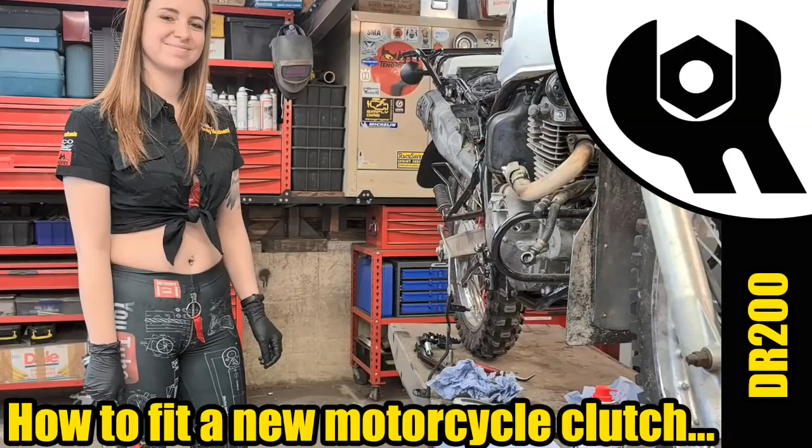Right, on this particular video, there has been a trend, we're busy reassembling this bike, getting it ready for an epic bike trip across New Zealand, covering almost 4,000 kilometres of gravel roads, beaches, forests, you name it.

I'm going places nobody has ever been on a DR200 before. In this video, we're actually going to start taking the bike apart again, because we really haven't done anything with the engine yet. We've done lots of other stuff, but the engine itself is as it came off the farm, and it had done 13,000 kilometres of farm use.

That's a lot of work for a little bike like this, and it may well have been mistreated quite a bit. So things like the clutch especially will have had a very hard time. Some riders on farms don't believe in changing gear - they could be in third gear and want to go really slow, rather than go down to first, they just ride the clutch. I've seen it many times and it just burns the clutch out.

So I don't know the condition of the clutch on this bike. It seems to ride okay. I remember I did ride it once, just around the garden, but it wasn't under any kind of real load, so it wasn't a true test.

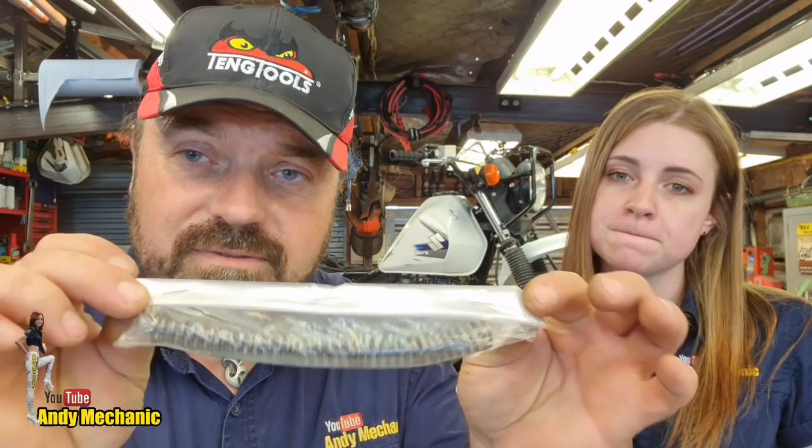Now, I do have some clutch springs - there's 5 in here, but I can't give you the part number because it hasn't got it on the bag. I don't know where these came from, to be honest. So I did order genuines, but this doesn't look like a genuine bag to me, so maybe they had to get aftermarket ones for those.

And last but not least, we need a clutch cover gasket. Here we are, brand new, genuine, and there's the part number again for that.

So we've got a lot to do, but we have to do it in 2 stages, and the reason for that is the friction plates need to be soaked in oil overnight before you fit them. You must not fit them dry. They're designed to run in oil, and if they're not soaked and they're still basically dry when you try and ride the bike, they're going to wear very quickly. That's not good because you're reducing the life of the clutch big time.

So in this video, we're going to strip it all down, get the old clutch plates out. We're going to soak the new clutch plates, and then we're going to pause, do another video on something else, and then tomorrow finish this video off. Now for you, the viewer, it'll seem seamless, it'll just happen, but be aware that the clutch plates will have been soaking for about 12 hours.

Which is fine. Okay, Holly, I've talked way too much, as I always do. Now is time for you to do some work on the tools. We're going to have to, looking at the bike, remove the right-hand foot peg again, which takes the right-hand side stand away.

We've got to remove the foot pedal brake off the bike because that's in the way of getting the clutch cover off. We need to drain the oil and maybe some other stuff. Oh yeah, there's some oil lines - it's got an oil cooler on it, so we've got some oil lines to disconnect as well. So we've got a few bits and pieces to do, and well, I suppose realistically we should really just crack on with the video, shouldn't we?

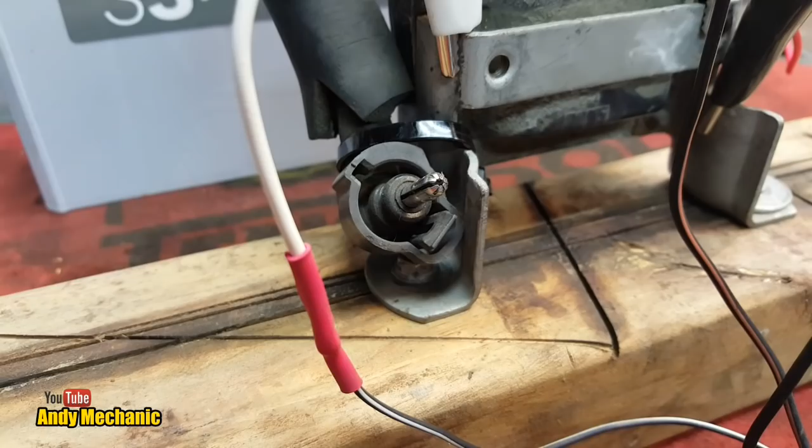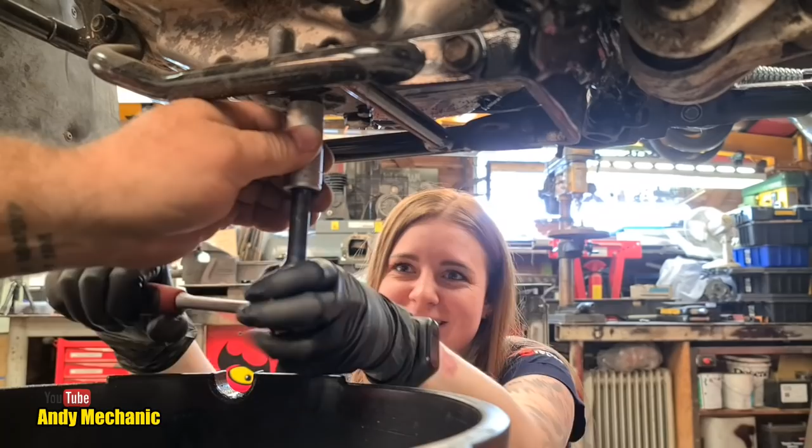I'll do the noise. Ready? Jeez, it's going to slip off, it's going to round off. Hang on, all right, you ready? All right, I'll give it a go. Hang on, I'll give you a bigger tool - bigger tools are always good. So it's 17, right? Yeah, all right, we'll go up in the world.

Okay, going bigger, there you go. Obviously somebody has massively over tightened that - you know, farm servicing and all that. How's that going to work? Is that going to work? Don't let it slip. Ooh, God. Oh man, who tightened that up? Jeez, that's ridiculous. All right, do you want me to crack it off for you? Yeah, that is just - you steady the bike. I'm going to get rid of that because it's all going to go a bit pear-shaped otherwise.

I don't have enough leverage. All right, you ready? Yeah. It's not going to fall over on you. Right, there you go, that's yours. It's cracked off, you can use the normal ratchet now if you want. That was ridiculously tight - I think it should be, well, we'll find out later on, but we'll find out in the servicing video, doing the service on the engine. I reckon it was probably about 20 Newton meters, it should be, and that was probably about 50. Poor little bolt. There you go, yeah, it's loose enough. Cool.

Right, prepare yourself, oil is coming. Let's see how good - it's probably quite thick and gloopy now, look. Nice torchy. Holy moly, that's pretty black, isn't it? Yeah, that oil's had a hard life in that little engine. Jeez. Okay, let's leave that to drain and we'll start taking some bits off.

Right, we're going to need to take the right-hand foot peg off and the side stand because it's all on these two bolts here. Now, if I remember rightly, they're pretty tight, so if you use that big power bar again - cool, you'll jump that down so it's not going to slip on it. There you go. Yeah. Go on, you're right, I've got it. Just don't slip. Too tight? I'll just bring it down a bit. Yeah, get some weight on it.

Jeez, you know we put thread lock on them as well. Oh man, the thread lock might have been a bit overkill. I think probably, because it's been on there for a long time now. Yeah, all right, let me go and get the big impact wrench - that's something you can definitely get them out with. Here we go, look at that - it's so much easier with power tools, isn't it? Oh yeah. Right, good job, I'll hold this, get the second one out. Beautiful. Fantastic, stick him on there.

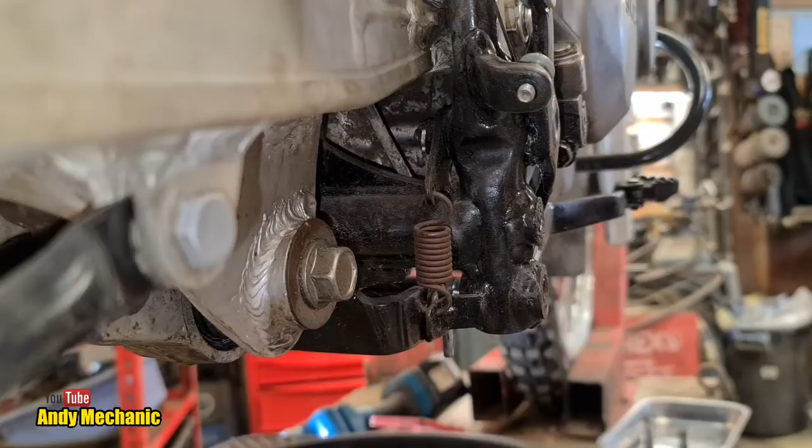Right, next job is to get this brake pedal out of the way, and then we can get the kickstart off, and then we'll do the brake line, the oil lines, and then we're about there. But this is a ball ache because it's got a little split pin right at the back, so see if you can get that split pin out. Okay, you've got pliers and side cutters and all sorts. Obviously we'll put a new one in when we come to do it.

I'll have to lend you a hair tie, won't I? Oh, that's tough. It is, isn't it? It's like, who put that there? Again, I mean, I might just replace it with a nylock nut and not have a split pin there for the trip, in case I've got to take it off for any reason, because it will be an absolute pain. It's all about trying to make the bike easy to maintain when you're out in the middle of nowhere.

Don't forget, when we first started doing this project, I didn't plan the trip. That came along a bit later on, so things I have to think about change.

I wonder if we put that on when the swing arm was out. Probably, and they would do that in the factory as well. Yeah, they don't really think of mechanics these days, do they? No, you burn so much time on these little fiddly jobs. It's a real pain. A screwdriver? We can do that.

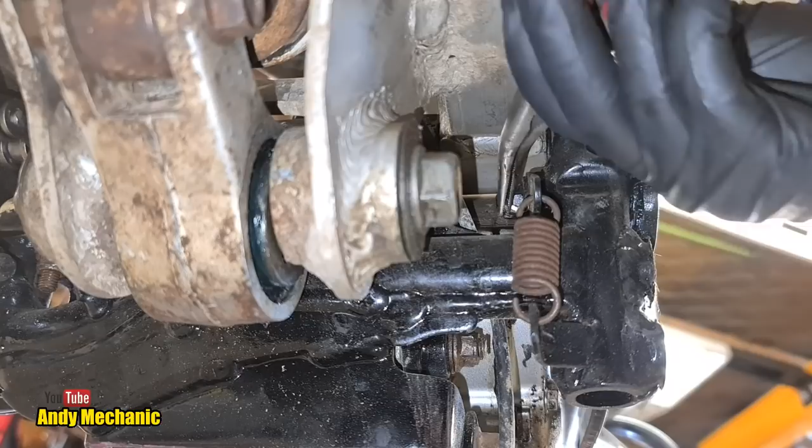I can actually see a lot better looking at the camera than probably you can see. Yeah, you can see what you're doing. I think you're doing a great job because it's a real fiddly one getting that one out. Don't worry, I'll edit this up so you'll look like a real pro. You're doing a really good job actually. You got one of them straight, haven't you? Yeah.

I'm not left-handed, so this is a bit... Yeah, that makes it even more difficult, doesn't it?

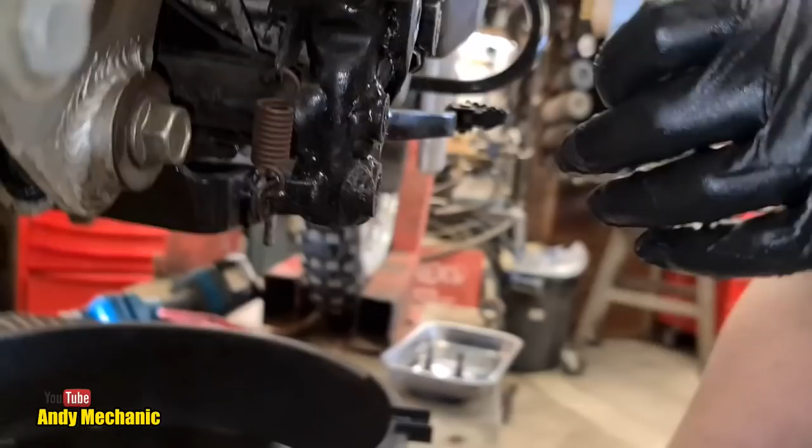You know what? Let's just do this. Are you going to give it a go? Yeah. Where's your screwdriver gone? I might be able to just ease that. If you can hold the top with your pliers, I might be able to bend this one round.

Nearly there. You got it? You got it? Looks like it, pretty much. Oh, team effort that, wasn't it? Yeah, jeez, okay, I think there is a nut behind there as well.

I think it's a 12. So I just want to grab a 12 spanner and then we'll see if it comes out. Oh, I'd use the ring end if you can. So you want to be going up with the spanner, that's it. If I remember rightly, once you cracked it off, it will come off with your fingers, and it won't be over tight, I don't think.

Do you want me to hold the lever? Yeah. Okay, the lever is held. You got it? Yeah. Not too much pain? No.

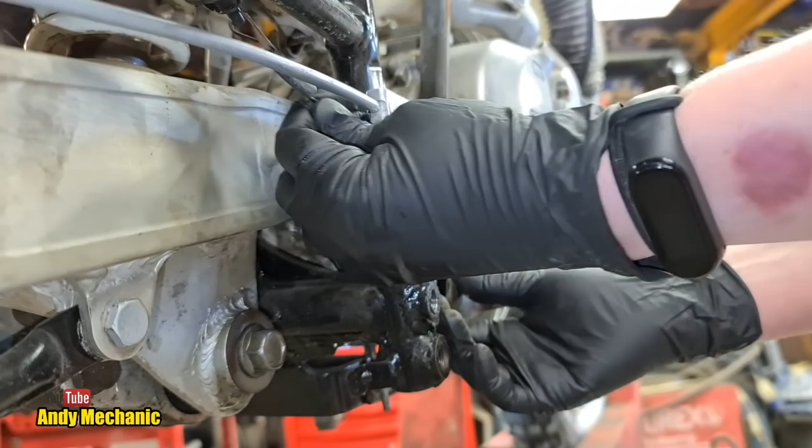Right, let's see if we can get that out without breaking the spring. Yes, there we go. Cool. Good job. Ooh, nice.

Okay, I'll stick him down there. We don't want to take him off the rod. There's no need for that. It can just sit like that for now, we can reassemble it. Okay, that's the hardest bit done.

Kickstart next. Looks like another 12, I think. So you can give that a go if you want, you've already got a 12mm spanner. Cool, I'll take over camera duty. Off you pop, let's see how you get on with that one. You'll be fine, you're a pro.

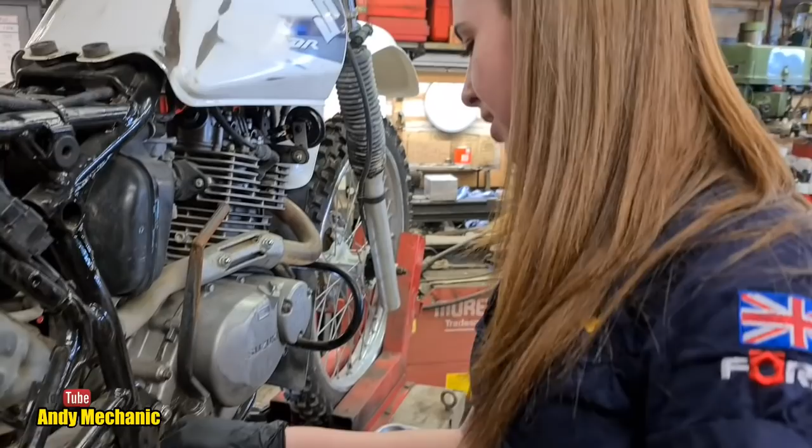This one was it? Yeah, should be a 12, I think. Oh no, this one. Here, look, that one, on the kickstart, yeah. They're usually quite tight though. Upwards.

Good job. See, to all the mechanics out there, you don't need hammers and things on spanners. Things are not normally that tight. So you break spanners as well, and they're not covered under warranty. That's right, speak to Brandon at Tang. He'll tell you that's not warranty. Easier to get ACC coverage.

Fix my hand. Oh yeah, what were you doing? I was smacking a hammer with it for half an hour. A spanner with it for half an hour.

Okay, now before you pull it off, is there a marking? Can you see a little dot to mark where the kickstart lines up with somewhere on there? Because it's pretty important that we get it back on the right place.

Not really? Okay, if you grab a rag and one of those paint pens, top right drawer of the snap-on toolbox, we can put a little line on it just to make our own reference point. Try the white one this time, because the red one we've killed, the yellow one we've killed too, haven't we? Yeah. It needs to go clean.

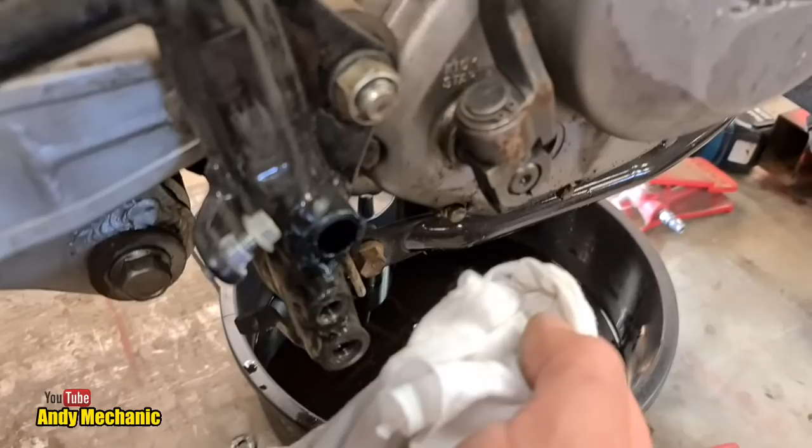Yeah, so if you give that a bit of a wipe, because it's going to be covered in grease. What do you say, you don't paint anything without cleaning it first? Yes, that's true. Is that what you said? It's all in the prep. That's right, there you go.

Just make a reference between the two components, doesn't matter where it is. Just gives us an indication later on, so we get it right, because there's nothing worse than getting things wrong, is there? No, having to redo it again. Okay, that should now pull off.

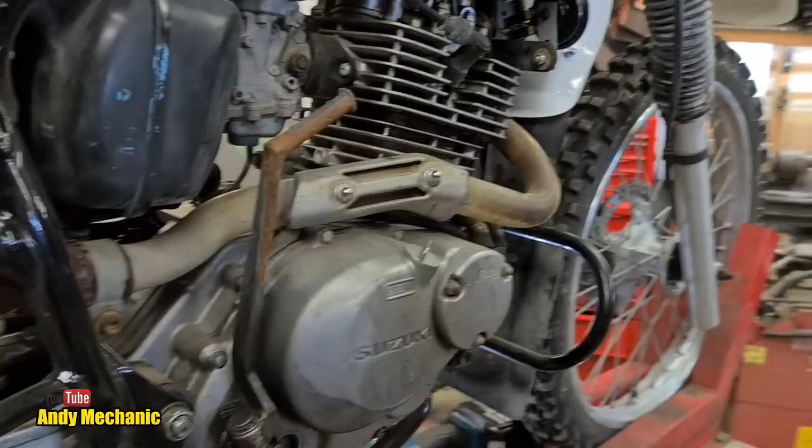Probably a two-hand job. Oh, there you go. Job done. Cool, okay, on the bench somewhere.

So what's left? We really are getting down to the clutch cover now, which is good. We're going to leave the oil filter in for now because that's going to get changed anyway when we actually service the bike, which is tomorrow.

But we've got these two oil lines to take off. Now please, whatever you do, don't lose these sealing rings, these washers, because I really don't have any more. And we are going to have to reuse them because of that.

Okay, so is it 17, or a 14, do you think? 14. 14. All right, spanner time.

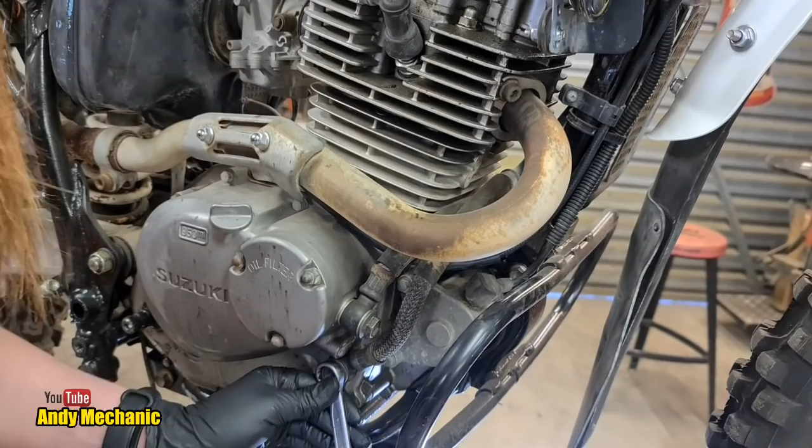Right, do you want the magic hammer because you've got two to tap off? See how tight they are. Yeah, because it has still got some magic left in it. There we go, that's one.

Cool. And it's probably going to dribble oil, so we might do well to just pull the pan across a bit, because they're for the oil cooler.

Is it going the right way? It is, eh? It is. That was very Kiwi. It is. Aye.

Yeah, that one might need a hammer. Okay, hammer time, where's magic hammer? Hang on, let's go and find magic hammer. There he is, it's looking pretty tired now.

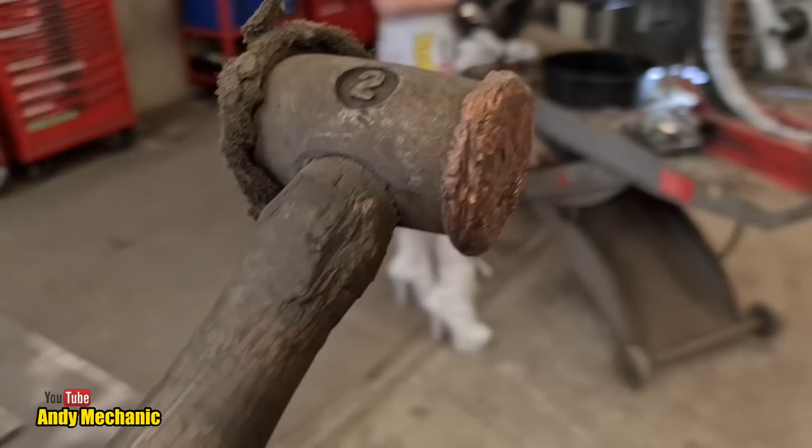Now, the last time I used magic hammer, I broke something very, very important to me. So good luck.

So at this point in time, we've got 4 washers that are not currently in the oil. How many do you think are going to stay out of the oil? All of them if I do it right. Cool, that's what I like to hear, because, you know, that's going to be 4 better than me.

This is where the cameraman gets in the way. Go away, leave me alone. Let me do my job.

Excellent stuff, so that's one off already, yeah? Yeah. Cool. And we can't get the pipes the wrong way around because one's a lot longer than the other, so that's good. It's a fail safe, so we don't need to label them up.

Now, are both the banjo bolts the same? That's the question, so just check before you put that one down. Yes, they are. Cool, okay, so it doesn't matter which one we use where.

Even better. Right, if we just see if we can tuck these forward out of the way. There we go, so they're going to be out of the way doing the clutch job now.

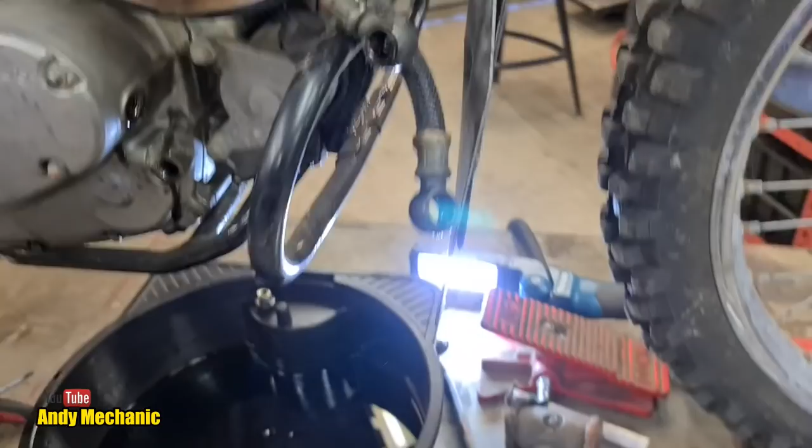And they're going to dribble oil on Thor. Sorry, Magic Hammer, not Thor. Right, stick him over there. Straight into shot.

Okay, so all we have to do now is there's a ring of bolts all the way around that cover. They're all little 8mm, so I think impact wrench. I've got to be careful because sometimes one of these is long, but these all look like nuts, so I think we're okay there. We can just ignore that.

The cover should come off even with that cap still in place, I think. We'll have to be careful. There might also be a hidden bolt behind the filter, so Suzuki might make us take the cover and the filter out to get to that bolt. We don't know yet, but we're going to find out.

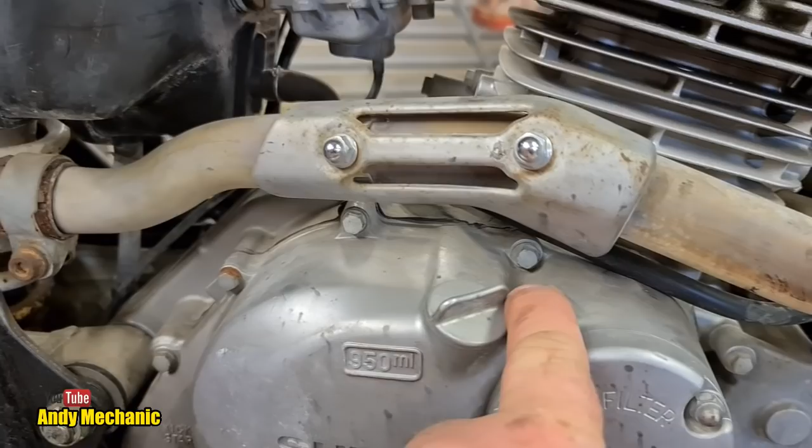Right, so you want impact wrench. I'd go 1/4 inch drive because it's quite tight getting into these places, so we need an adapter for the little impact as well. Holly, if you want to work your way around and get them all pulled out, we could note which one goes where, but that's difficult without cardboard and time, so we'll use an educated guess later and see how many are different lengths as we do it.

I wonder if this has ever been taken apart before. There you go, pop them in there.

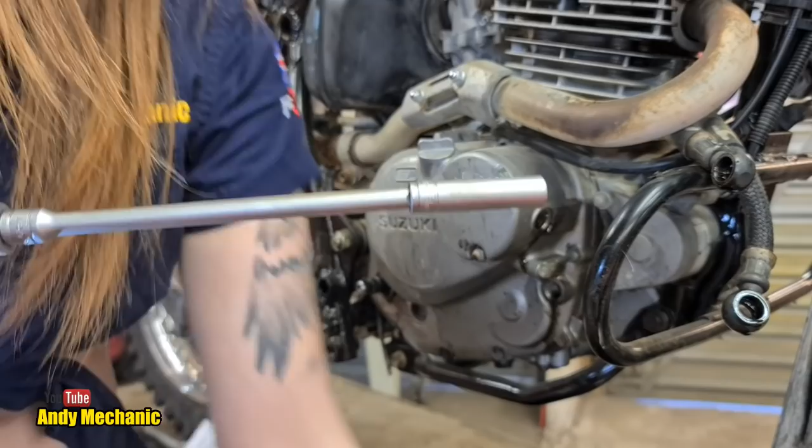So they've both got washers on, or just one with a washer on it? Just one with a washer on so far. In front of the camera, Andy. What the hell, that one's longer. Yeah, and this one was the one with the washer, wasn't it? So we'll put a little line on there to remind us. Shorter again, yeah, it's quite a mixture. We'll have to be careful when we put them back in that we've got equal length showing before we tighten them up.

Now what I'm noticing here is, look, what's that stuff on the filter? Silicon, it is. What's that tell us? That tells us they've used silicone for a gasket, so somebody's been in already and couldn't be bothered to fit a new gasket. Unless it didn't come with a gasket. We should do, we've got a brand new one on the bench. So it's already had work, and they've skipped the proper gasket. It's actually quite a good job that we're going in there, because it might have started to leak oil on the trip, I think.

Is that all of them, or is there one more? That's quite a big gap, isn't it? Quite a big gap between. I reckon we're going to take that cover off, I reckon there's a bolt in there. Yeah, there's too big a gap on the cover. You should really have a bolt around here somewhere, so I bet it's inside there.

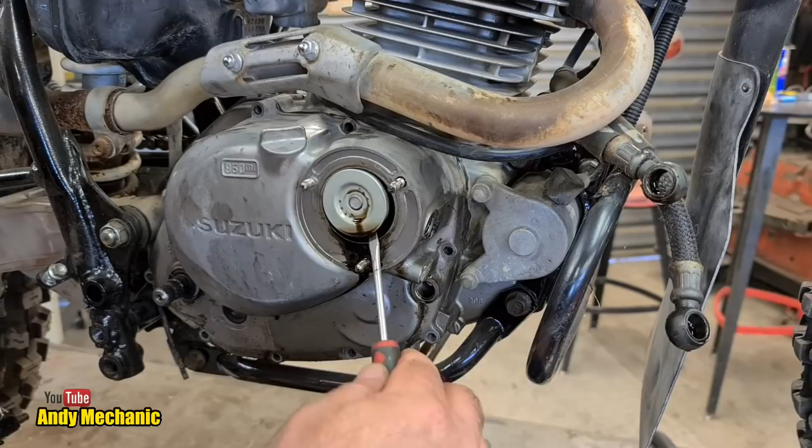Now, one thing to take note is, because we're doing an oil change and putting a new filter in tomorrow, we've got to note the orientation of the filter, because believe it or not, some techs have been known to put filters in the wrong way around.

And you see that? On the end there, it's got a blank on it, that's a one-way valve. Yeah, and there's actually no rubber O-ring at the back, no seal. Normally you find a seal down there on most bikes, this one doesn't have it, so it'll be interesting to see if the new filter has got a seal. In fact, the box that the filter we've got doesn't look anywhere near as big as that.

Jeez, okay, right, well I think yes, that one is a stud. So that stud is off the engine case and it comes all the way through this cover, so we did well to undo that, we had to undo that nut. These two are just studs that are tapped into the cover.

Okay, so we now need the magic hammer again. You can be the first person to use the new magic hammer. Look at that, you got it? Yeah, okay, so nylon end again, because the other one's pretty knackered, isn't it? Yeah, right, let's see if I can get under here somewhere and just ease it off.

There we go. Got all that oil. It's just stuck at the back, isn't it? I'll come around this side of it now, see if I can get somewhere under. Ah, there we are, look, there's a little lug there that they've given us. There we go, if you grab hold of it, it's coming your way.

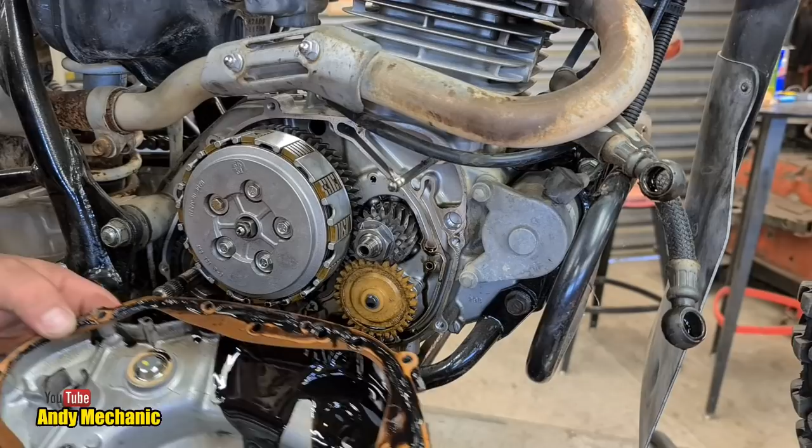If you just flick it over, make sure there's nothing. Oh, there is a gasket, but they've just reused the old one, and look at the amount of sealant they put on it. If any of that had broken off, it could have got stuck in the oil pump, or on the gauze, the pickup. Could have caused a major problem. Holy moly, and both dowels are in place, aren't they? Yep, 1, 2. Excellent.

Good job, Holly, that was excellent stuff. Now the prize is here, this is what we need. It looks to me like it's got a mixture of clutch plates in there.

Okay, let's have a little look around, let's do a Millennium Falcon flyby. Right, we're going in. We just want to record what the current state is so I can have a look at it tonight before we put the whole thing back together again tomorrow after we've soaked the clutch plates. Let's have a little look around, make sure we don't spot any problems, because this bike's got a long, long way to go.

What's the primary like? It actually looks pretty clean. But looking at these clutch plates, you notice that some plates have got this little notch in one of these little tangs. We'll see them on the close-up when we pull it apart. I'm a little bit dubious as to whether that's been put together correctly.

So if we look around the basket, nearly all of these have got a semicircle cut out going round. That one hasn't, that one hasn't, and all these have, and those two haven't. Now they're very, very important, and we'll see why when we read the manual properly.

This is going to be good. Where the hell's Holly gone? She was in the workshop. What are you doing over there? Come back, come over here. We're filming.

Right, so very, very important that we align the new friction plates correctly. It tells us in the manual, we're going to have a little look in a minute. And from what I see, on initial inspection, there appears to be a problem. The person that worked on that bike previously has already made one mistake. They've used the old gasket and just put RTV silicone sealant everywhere, haven't they, to try and hope that it doesn't leak. Yeah, that's wrong. Use a new gasket, people.

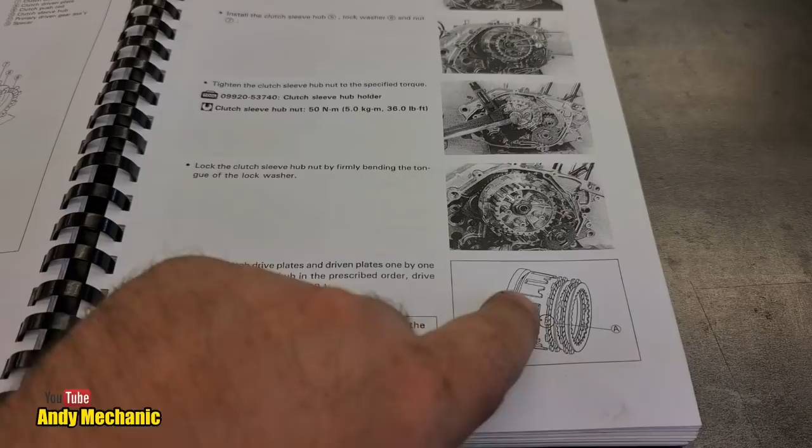Now, I wasn't going to cover this at this stage in the video, I was going to cover it during the rebuild, but I think it's important to highlight a problem that I've potentially spotted. It says here: caution. Now that's not danger, I know, but it's caution, which means it's important. When installing the clutch drive plate number 1, align the mark A on the drive plate with the clutch housing as shown in the illustration. Remember on the basket we had those two prongs, basically, which were flat. They had a square end, they didn't have the semicircle on, and we have an indent in the plate.

So if we take the plate out of the bag without bending it, because that's really important, otherwise you'll get clutch drag. If you look at the plate, you will notice that these little prongs around here - that one has the semicircle. There, look, and on the opposite side it also has a semicircle. Well, those two have to line up with those square-edged parts of the basket.

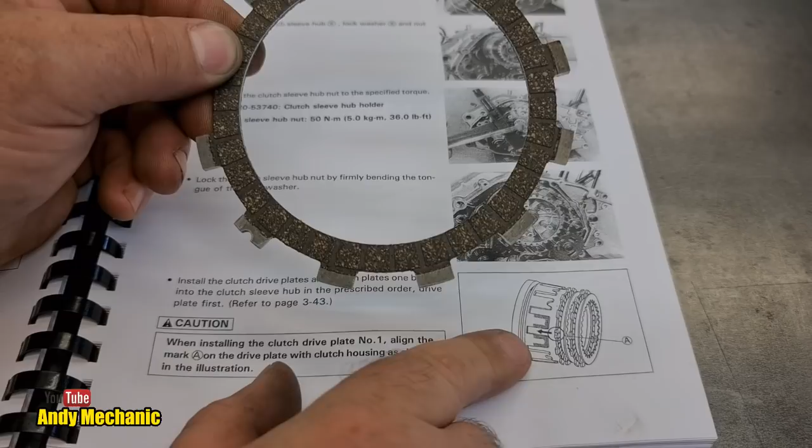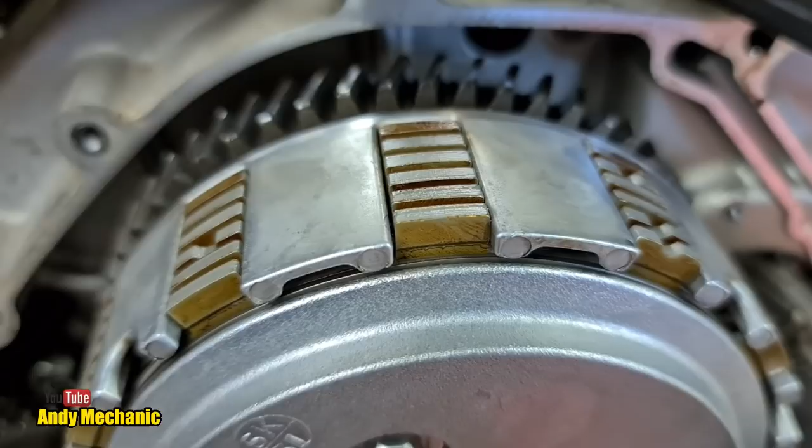Let's go and see if that's the case on the clutch that's currently fitted. Now, what we've got here is a close-up of the clutch basket and the plates. So I'm just going to rotate the engine around, and I'm going to bring that round so that we've got the two prongs facing us as per the diagram, and there should be at that location there the indent, the little semicircle on the clutch plate itself.

This bit, well, I know my eyesight's crap, but there isn't one there. Okay, it should be on that plate in that location there. Now, I'm not saying the plate hasn't got it, it's just in the wrong place. So let's have a little look around - we're just going to rotate it all the way around and see if we can find or see any indents on that plate.

There he is, there's one, look. And believe it or not, these two prongs have the semicircles. So whoever assembled this clutch took no attention whatsoever to aligning that particular friction plate correctly. Not impressed at all. We are very close.

Okay, one impact wrench. Now it's really important that we undo these bolts in a star pattern, like a wheel nut on a wheel. We also need to bring them out evenly, bring this cover off basically parallel. We don't want it to twist off to one side, because that causes serious problems to the springs and to the mechanism. It's bad practice. So you can start wherever you want, but then just do opposites. Do maybe a couple of turns each and then go around again.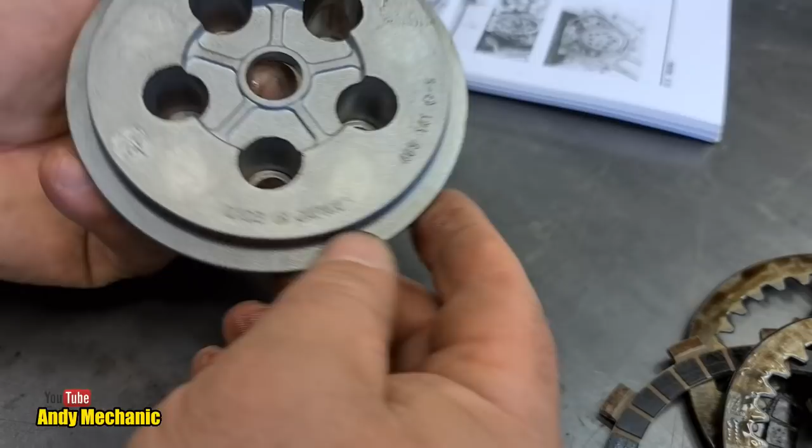Made in Japan, that word there is quality. I like Japanese stuff, it is good. They really care about what they make. Yeah, a lot of pride goes into their vehicles and the design.

Holly, did you spot any other differences between the innermost friction plates, that special one, and the normal ones? Only that the friction material goes further out towards each of the tabs. Ah, okay, because that's an example of all the rest of them, and this is the special one. So there you go, you can really compare that yourself. We'll hold that nice and still on the camera.

In order so we don't get these confused during the oil soaking process, I've just chucked a zip tie loosely around that special friction plate. Right, Holly, we need to debag - not the steelies, they can stay dry, we don't need to soak those - but the rest of the friction plates, if you can debag those for us, and then we're going to put them in the tray, pour some oil on, and then it's beer o'clock. Awesome, woohoo, can't wait, it's going to be great. So ready, very very ready, to be honest, and we're going to have to do a trip and get a box, because we don't have enough for the night.

Last one in, I'll do one. I'll help you because I feel like I'm doing nothing here.

So we've had a pretty good day so far, we've done quite a bit. It's nice to get into a more technical job than just fitting mud guards and number plates and things. But they were all jobs that needed to be done, so we had to do them, didn't we? Yeah, it's all part of doing the project.

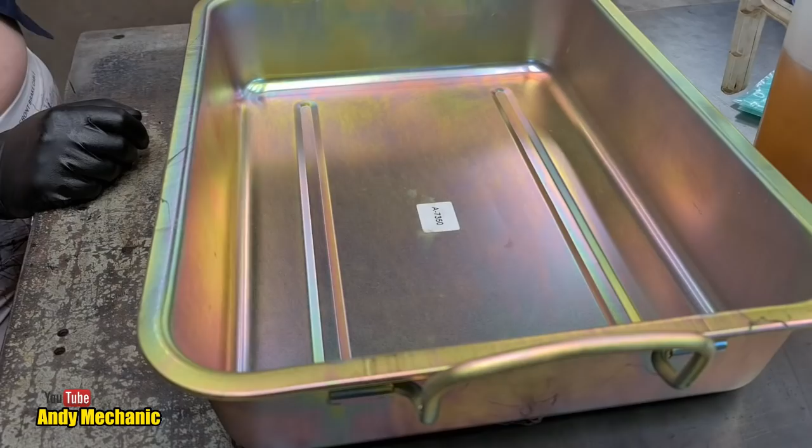Okay, so if you grab all of those and head over to the soaking tray, we'll get them dipped in some oil and left overnight. Alright, Holly, if you want to lay them all out in there around, because we want to try and keep the depth of oil to a minimum so we're not wasting oil. Oh, look at that, good job. Then we'll just lay one on top, I suppose, and get them all in.

This is why I pay the big bucks, isn't it? That's fantastic. Right, you've got a jug of oil. If you pour enough in to at least more than cover all of them, and if you end up using the whole jug it doesn't matter, it's not the end of the world.

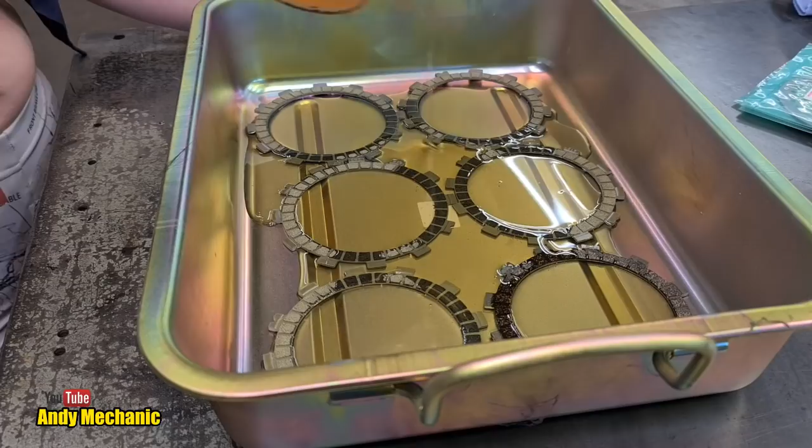And it's really important that you do this to friction plates on motorcycles that have wet clutches a good 12 hours before you fit the plates. Otherwise the clutch plates will wear out a lot quicker. This is standard practice for motorcycle maintenance. And you'd be surprised, it doesn't always happen in workshops. You know, a bike comes in, it gets diagnosed a faulty clutch, the customer's in a rush, can you chuck a new clutch in it? Yeah sure mate, no problem at all. And the plates go in dry. And that's bad, yeah, it's really bad.

It almost looks like you're doing a cooking channel. It does.

Cool, now everything's covered, isn't it? Yeah, there's no point putting that little bit back in the pot. Chances are we'll actually just use that oil as the fresh engine oil when we do the oil change - it's not been contaminated, has it? It's going to be friends with the friction plates anyway tomorrow. Yeah, so there's no need to waste it.

Cool, right, well we'll leave that overnight. Awesome. Where's the KY? Oh, we're running, hang on. Right, so Holly very, very professionally is now soaking the friction plates.

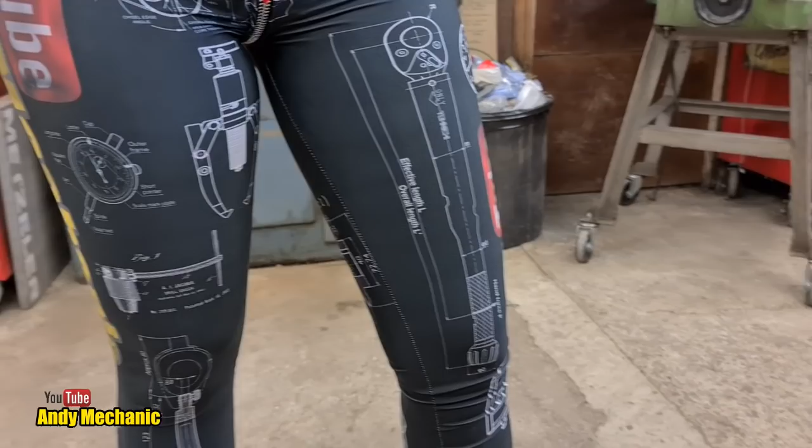Holly, before we get into it, your shirt seems to have changed colour. Yeah, it has, got a new outfit. Seriously? Let's take a look. Holy moly, give us a turn. It's black - you had white leggings on yesterday and white boots and a blue shirt, and now it's all black. You've got some different stuff on your leggings, look - a torque wrench, pullers, verniers, another torque wrench. Oh man, we've got all sorts of gear on there. And a new updated logo as well. How do they feel? Feels really good. Yeah, you like those? It's awesome. Black's your colour, isn't it? It is.

Good job. Right, without getting too distracted, we really should crack on because we're running - what time is it? It's 11:30 now. We've got to be away from here by 6, and we've still got a shit ton to do, haven't we? Yeah, right, back to work. Cool.

Okay crew, we're going to rattle on. Now the clutch plates, like I said before, they've been soaking overnight so they're ready to go - the friction plates. We now have this mess to tidy up, don't we? Yeah, so Holly, we'll get some blue roll on the bench, I'll get your blade, we'll pull out the dowels, and then you can make a start cleaning all that up. Cool, because you know how to remove gaskets - you've done plenty of that stuff, haven't you? Yeah. Okay, right, well that's over to you, I'm going to be camera person.

Right Holly, quickly run through all the bits and pieces you're going to use to get this nasty gasket off and the RTV. Okay, so we're going to start with some gasket stripper, spray that all around the gasket, hopefully it'll help it come off a lot easier. And then we're going to try and peel it off with scraper and razor blade. Once I've gotten all the extra chunky bits off, I'm going to go over it with - what do we call this one - service lube and some Scotch-Brite to smooth down the surface and give it a wipe clean. Just the final clean up, eh? Yeah. Cool, okay, you crack on, I'll do the filming.

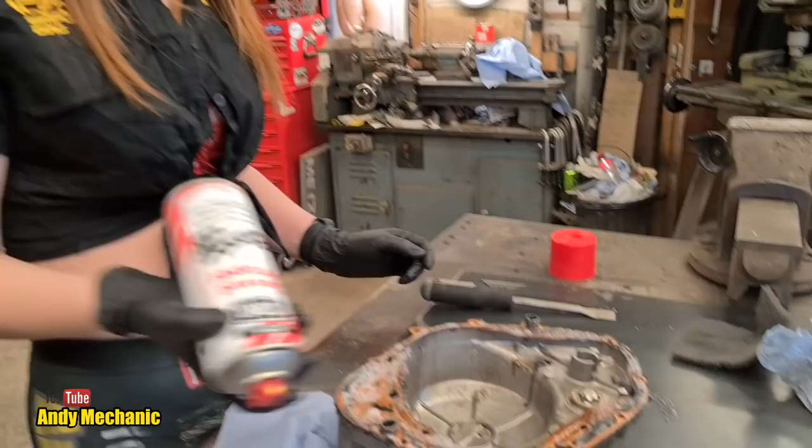Is it the kind of spray you need to use in a really well ventilated area? Does it smell quite bad, or is it all right? I can't smell it at all yet. Oh, that's pretty good, because some sprays are horrendous, aren't they - they just knock you out if you haven't got a good airflow. That's right. How long you need to wait? I'm going to get you some pliers so we can pull those dowels out as well, because that'll make it easier, won't it? Yeah.

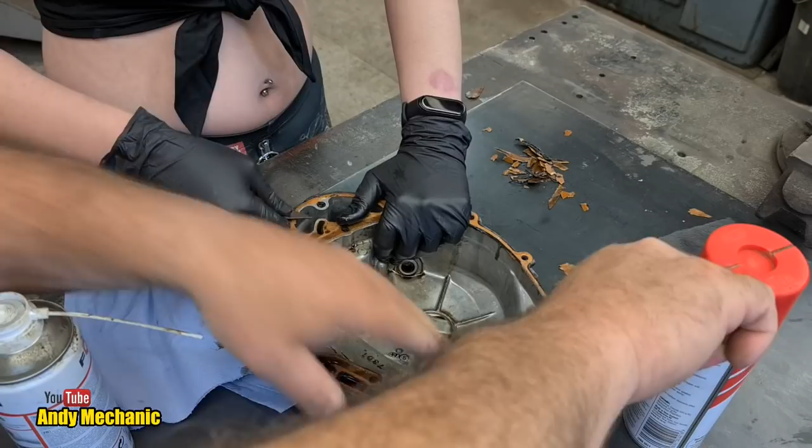There we go. It's probably quite old, that gasket - probably the original gasket that the bike was born with, to be fair. One thing I haven't done is check to make sure that the new gasket's the right one. I have faith in my supplier. Hopefully it is, otherwise we've got a bit of a problem, haven't we? Yeah. Must not lose these dowels. Are they the same? They are. They normally are.

It's not often you have two people doing one gasket, is it, to be fair? You're doing very well not to tell me off for moving it around.

It's very important that you don't dig into the aluminium surface, because you could actually create a leak. We're trying to keep it as flat as we can, so you've got to take a bit of time doing it.

I'm not convinced this gasket was doing much. Well, I couldn't get the Förch stuff, so we had to make do. I don't think it's so clear as well. No, well, I wonder if the RTV has created an impermeable seal on top of the gasket, so it's no longer a paper gasket, it's a coated gasket. I don't think so, because even when you're scraping off the surface layer of the gasket, it's still not doing anything. It's just a special gasket.

Oh, that's coming off a lot easier now, with the 10-minute wait. Yeah, you gotta soak it.

Well, that's good to know. I think you have to let it sink in. I'm just going to try and get it. I can get underneath the gasket, get the whole thing off like a big chunk, so I'm going to keep doing that, but the bits I can't, it'll soak in.

I guarantee Jared's going to give me a can of gasket removal spray next. You wait, he watches all the videos, you know. All of them, not all the live streams, but he watches all the videos. I think he's just waiting for me to start his buggy, his go-kart. Sorry mate, too busy, we'll get round to it next year. We're getting there, yeah, we are getting there now.

I'm going to take a look at that casing. I'll leave you to it. I'm going to steal the camera for a bit. Right, so what's the other gasket surface like? We're going to get away with just a quick wipe down, or is it going to be a ball ache?

Oh, I think we're alright there. I'll just give it a quick wipe round with a rag, and I think we're good to go on there. Excellent.

Look at that, it's like a new one. Yeah, fucking good, that Scotch Brite's a great idea, isn't it? Because it doesn't dig into the aluminium, it just gets the debris off.

That's excellent work with that. You got much more to do? Nearly all the way around now, pretty much done. Right, just a bit of a flush out to get rid of all the crap. Yeah, and then we can leave that to dry while we're fitting the clutch plates, can't we?

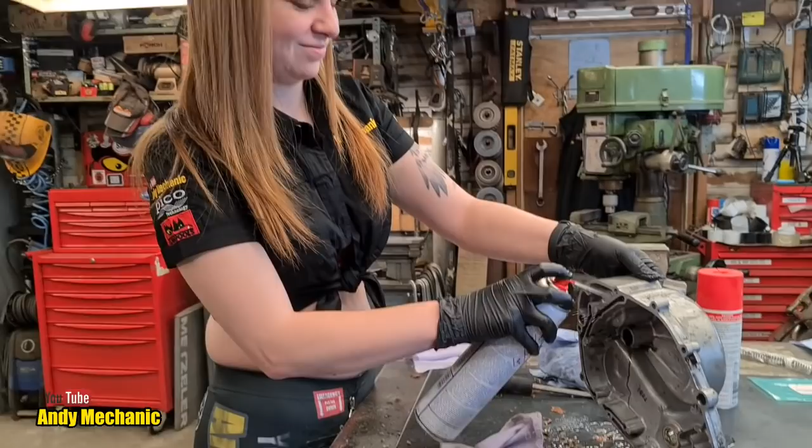It's more. Jeez, nearly got the camera.

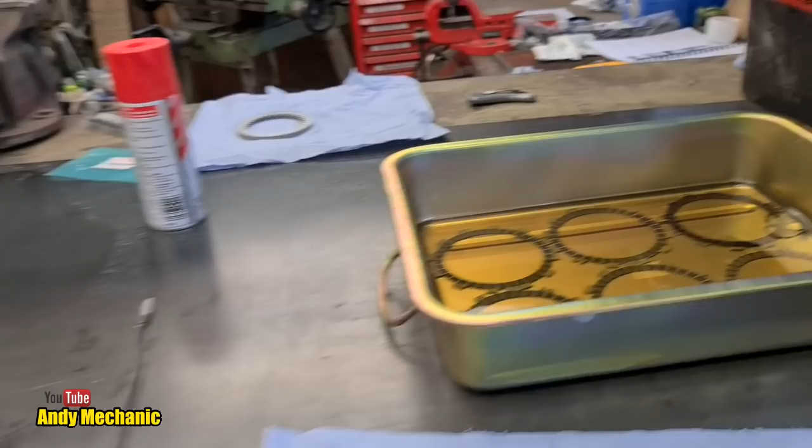Right, so while you're doing that, finishing that off, I'm going to just get these friction plates taken out so they can be dripping off, get rid of the excess.

Holy moly, that's a lot of brake cleaner. Oh, no cigarettes in the bin for a while. I thought brake cleaner evaporated away, but not when you've got that much of it, yeah, it took a while. Oh, like a tsunami of brake cleaner everywhere.

Right, so you reckon we're done? Yep. Blowing the silicone out. Yeah, bloody silicone, honestly, who needs that? It looks really clean now. That was a good job to do that.

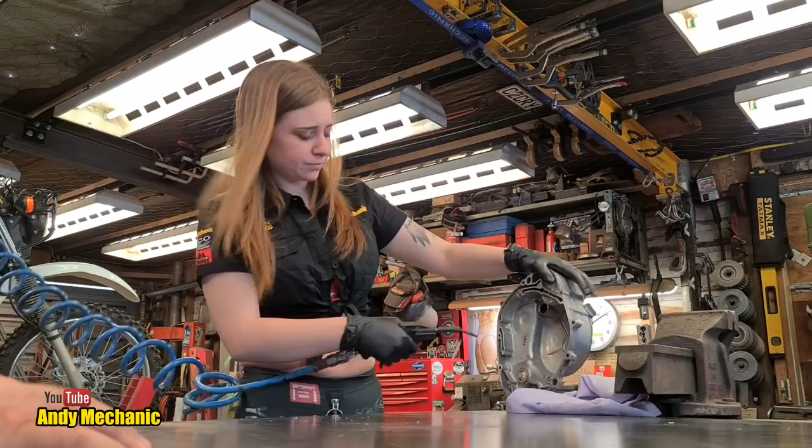Excellent. Right, assembly time. Cool. Good job.

Well, that was a task and a half, wasn't it? Yeah. So we've edited it right down, didn't want you watching us cleaning off the gasket for the next half an hour or so. Top tip: gasket stripper, read the instructions before you use it.

Ideally we should have sprayed that gasket last night, when we put the friction plates in the oil as well. Left overnight, chances are it would have just dropped off first thing this morning in the video, but we didn't. So live and learn. But it seemed, once it had maybe 15 minutes to work, the old CRC gasket stripper, code 5021 - not a sponsor of the channel, just happens to be on the shelf - seemed to work pretty well. Yep, it wasn't phenomenal but it was pretty good. Quite happy with that. Yeah, well done, CRC.

Okay, right, now what we need to do is fit the friction and steel plates to the basket. So Holly, if you just whiz around there and grab me that, everything's on that tissue there, look, and we can present that now, and then we can get on and go for it. Yeah, you can just pass it over here if you want.

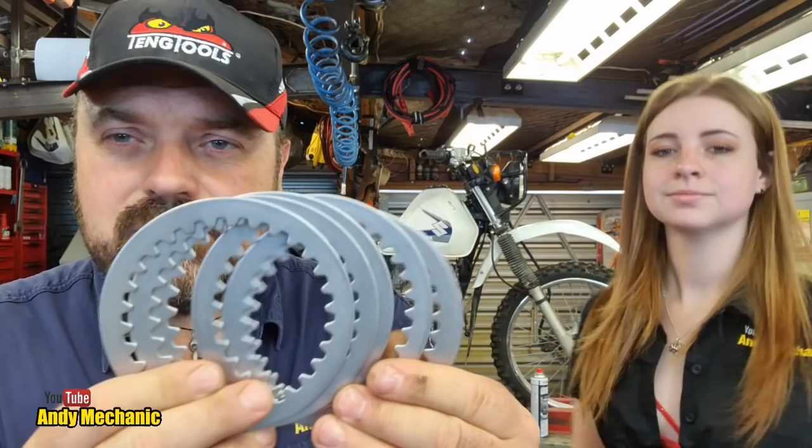Sorry. Cool, so we've got all the steelies unpacked, and there's 6 of those. Not cheap, by the way. And we've got the springs and the part number for these steelies - I've taken out the bag already. That's the part number for the steel plates, and they're all the same, so you need 6 of those.

Like I said before, the springs, I have no idea where these came from. Doesn't look like they're genuine, and there's no part number, so we've just got new springs. They might be heavy duty ones that they've sourced me - we'll find out. Okay, assembly time. Cool, let's do this and then we can have some lunch. Let's crack on. Right, Holly, ready when you are.

Right, now this is a fun bit. These are all now obviously pre-oiled, and remember yesterday we discovered that they'd fitted this one incorrectly. Yep, so that little notch there should go between that one and that one. Okay, yeah that's cool. All right, so you want to offer that one up and slide it down. So there or here? Yeah, no - that one and that one have got the flats on the end, so between those two. Okay, that's it.

So you slide that down for us and push it all the way, and then we'll give you a steel plate - that's next. Doesn't matter which, no it doesn't matter which way round, there's no markings on it to say it's got to go in a particular way. Right, standard friction plate is next, so it doesn't matter where that goes, that can just go anywhere. Even the notches? Yeah, it doesn't mention anything about the notches on the standard ones.

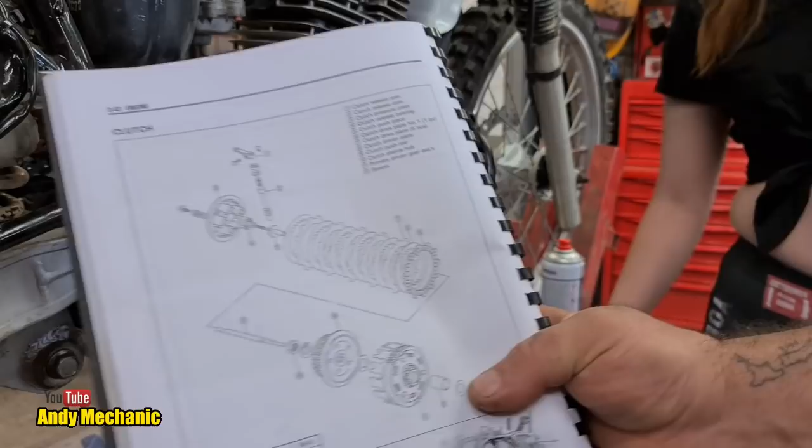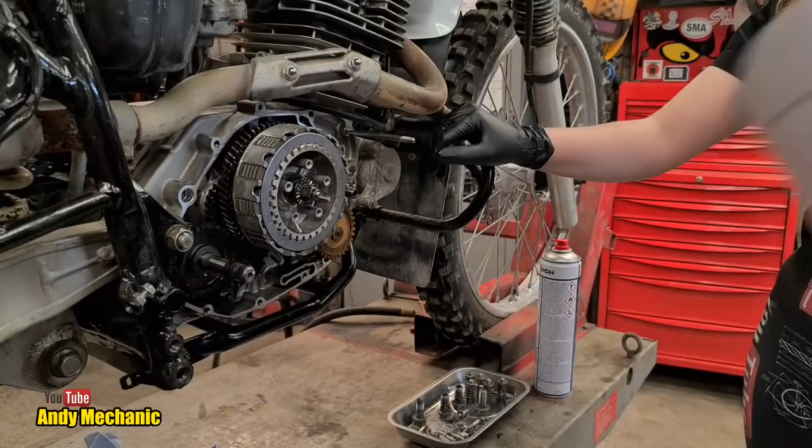I'll have to review the footage. That's the benefit of video, I suppose. But you could be right, but that's where it should be - we've done it right now. Yeah, yeah, yeah.

Sorry, Holly, we were just busy looking at a clutch thingy there. So yeah, we've done it right now. The assembly that we've done is as per the manual, but who knows what the previous guy's done - he's just thrown it together on a Friday afternoon, I think.

Okay, so next job is inside here, we've got that washer. We don't want to lose that, and that washer runs on the bearing. If you want to offer that in, it can go in any one of 5 positions, so it just drops over those 5 little turrets. Now it might fall out because it's only held in by the suction of the oil.

And then in the tray, we've got the 5 springs with bolts just to the right hand side of the tray. Now I know one of the bolts isn't standard. At this point in time, I don't have a replacement, but it's an easy job later on to change it.

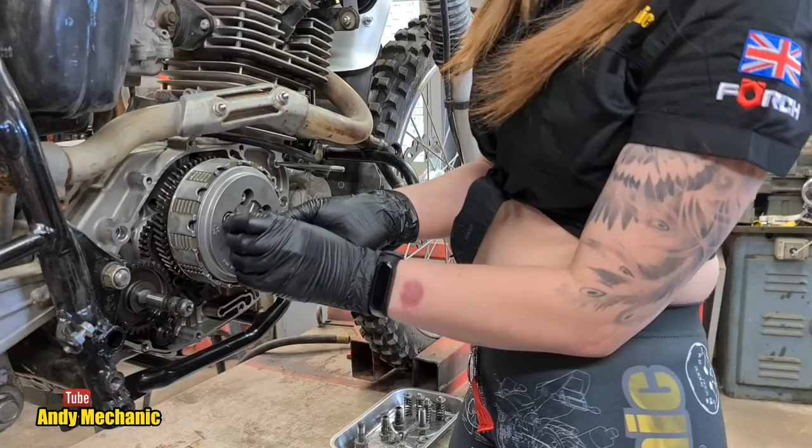So if you want to just wind those in until the spring starts to compress, and then we go through the same procedure again of slowly tightening them up.

Actually, one thing I'd like to do is put some thread lock on these bolts. I know I didn't have them before. I'm not sure if the manual tells us to or not - I'll just have a quick read through.

No, there's no mention of Suzuki wanting us to put thread lock on those, but I think the weakest thread lock is a good idea, because if one of those bolts comes loose, it's going to cause a lot of damage inside the engine, and they're easy to undo with normal thread lock.

Okay, so there we are - a bit of Förch K120, just a tiny blob. That's all we need, and then you can wind that in with the spring to finger tight, till it's just starting to nip the spring up, and then we'll do the next one.

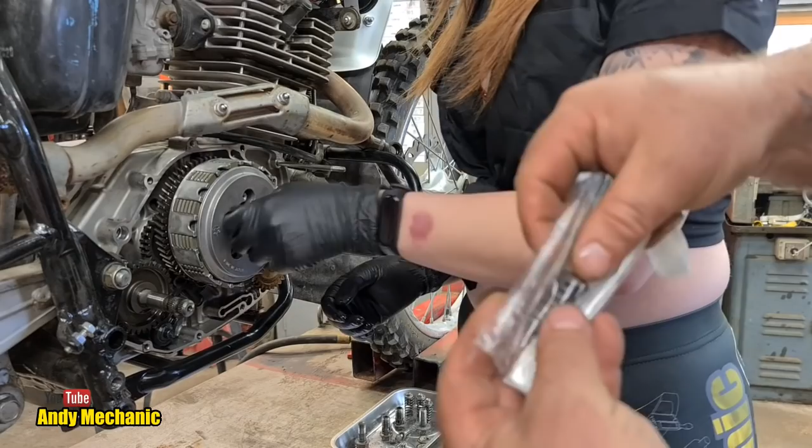There we go. Oh, we've got new springs to fit, haven't we? God damn, okay, you'll have to pull that other one out. Sorry, I forgot - new springs. So I'll feed you the new springs at the same time. That'll work. Getting carried away here, weren't we? I think your question threw me off. That's what it was, it's all your fault. No, I'm just useless, basically.

I wonder if these springs are a little bit harder, because it's only these 5 springs that are squashing those plates together to transmit drive. Just like the diaphragm spring on your car clutch - that's all it is. So if these get hot one day and they lose some of their strength, then there won't be as much clamping force and it's more likely it's going to slip. And it's downhill all the way after that. Like you want a spring, don't you? There you go.

Cool, yeah, right, I'm ready for the next one when you are. That's enough, as long as it just takes up the slack, because we want to make sure that thing's going to go down evenly, that outer plate. Did that have thread lock on it, that one? Yep, did, cool. Right, Holly.

Number 3, ready? Yep, right, bit of thread lock. There's your new spring. There you go.

This was the first time you've ever done a motorcycle clutch, isn't it? Yeah. Yeah, cool. I mean, this particular arrangement is a very standard setup for a motorcycle. So if you pull apart your GN125, it's probably the exact same clutch, to be fair. But the way that they operate is the same.

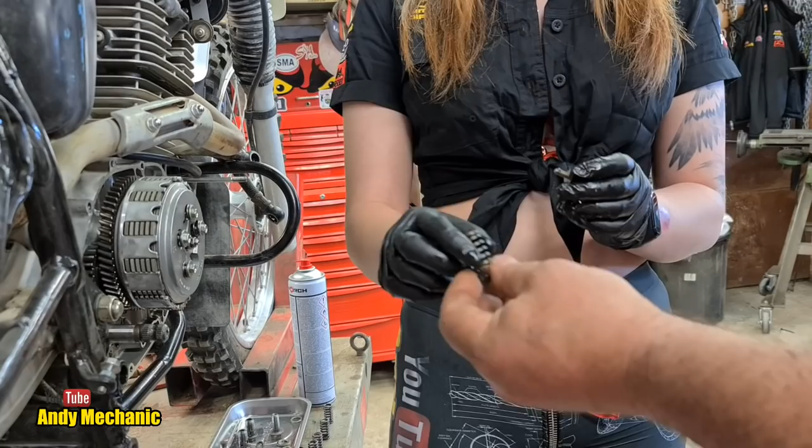I'm just checking the service manual. This is the genuine Suzuki Service Manual, and I'm looking for a torque setting for the bolts that retain the clutch springs.

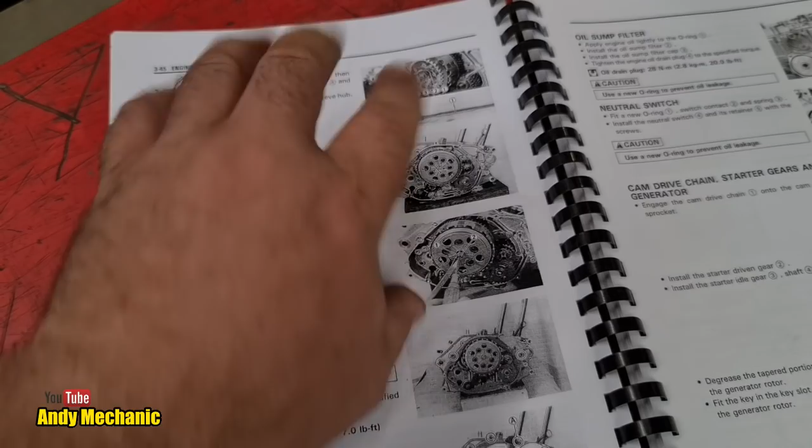Reading down here, they don't say anything but to tighten them up. Down here it says to tighten the clutch spring set bolts in a manner indicated, so that's in the order. So we've got a star pattern again, like a wheel nut. Tighten them by degrees, little by little, to try and attain a uniform tightness, and to keep that plate parallel to the friction plates. We don't want it to go on at an angle, as that's bad, and it also puts pressure on the little turrets that have the threads for those bolts.

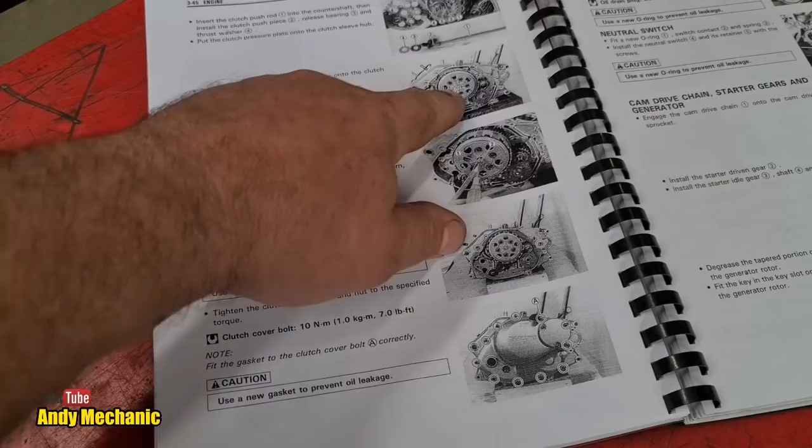This is clutch cover bolts, 10 Newton meters, but there's no mention actually of those 5 clutch spring bolts. So I've Googled it, and Google says 7 Newton meters for an M5 bolt, which is what they are. So I'm going to do them at 7 Newton meters. And of course we've got the thread lock on there, just in case.

Right Holly, because they're such small bolts you should be able to just wind them in by hand, doing it in star pattern as you did before. If you just do 2 or 3 turns each, then go to the next one, and just keep working your way around until they're all down snug, and then we'll torque them to 7 Newton meters.

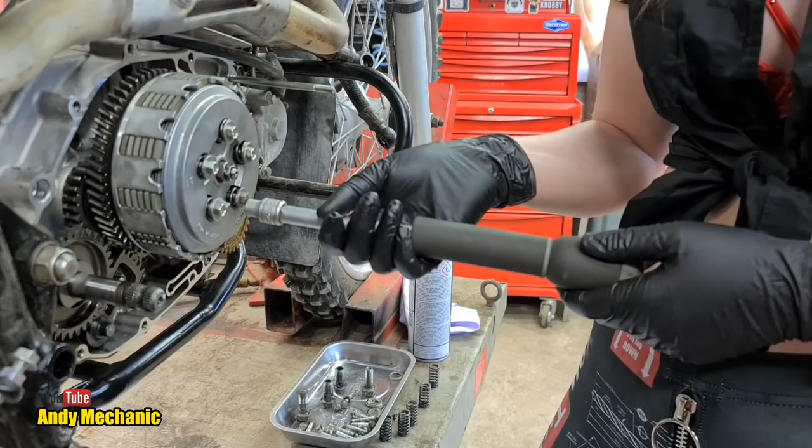It feels a bit painful doing it like this, but this is what you really should do. Most people don't, but you should.

That odd bolt is grinding my bones. How can you lose a bolt? It's going to be on your bench somewhere, isn't it? You just dropped it, or maybe it's gone down a grate somewhere. Yeah, it's a bit harsh. I'll get a new one.

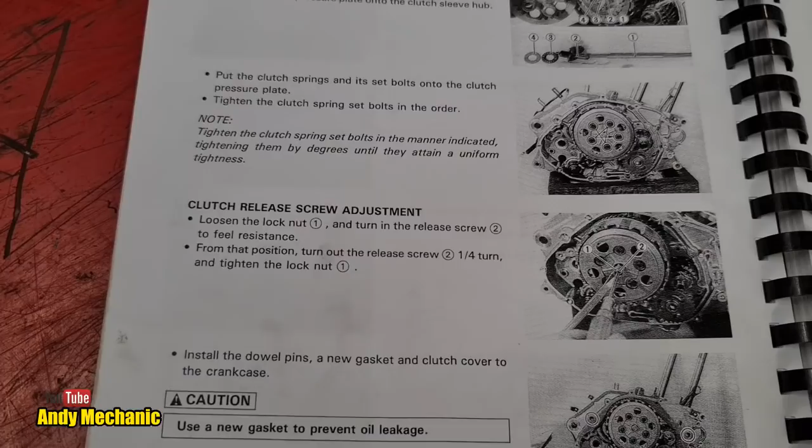Right Holly, we now need to know what adjustment to make to that push rod. Let's take a look in the manual. Now, according to Mr. Suzuki, we need to loosen the lock nut 1 and turn in the release screw 2, clockwise, until we feel a resistance. From that position, turn out the release screw 2 a quarter of a turn, and tighten the lock nut. And then we're good to go.

Excellent. Right Holly, Mr. Suzuki's been really nice to us and put a 12mm square shank on the main component there, so you can put a 12mm spanner on there and then use your ring spanner, a 10mm ring spanner, on the actual lock nut.

Give that a go. It shouldn't be too tight. Oh, there you go. Right, that's cool. So actually you can keep your spanners in place.

If I just let you reset and put them back on, then I can make the adjustment to the adjuster screw. It says in the manual, this is the benefit of 4 hands, not 2, to turn it all the way in until you feel a resistance. So I'm feeling resistance just there. And then it says to turn it a quarter of a turn back, which is that much. There you go, if you want to nip that lock nut back up again.

That'll just hold the adjuster screw in place. I'm just going to maintain position of that. Cool, that's it. Happy with that? Just about. Got your torque setting right? Click, click. Cool, done. Time for a clutch cover.

Right, Holly. Around here we've got 2 places where the dowels go in. I've given them a clean up. If you want to pop those in, then we should be able to get the gasket to sit in position on those dowels.

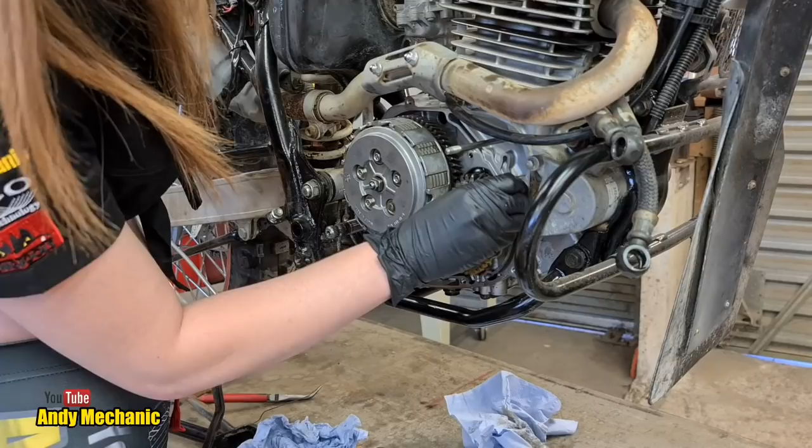I don't want to go in very far on that side. Oh, they'll only go in a few mil, because they're supposed to stick out since they go into the cover as well. Yeah, but it just - oh, is it just not playing ball, is that one? That one went in.

Turn it around, might be a bit happier. There you go, okay, that's that one. And if you use, you can just give them a little tap with the end of the screwdriver just to make sure that they're seated all the way.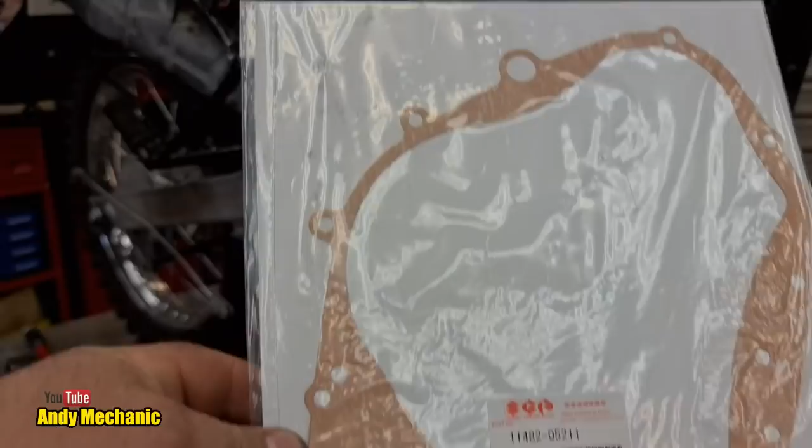Coolio. Right, new gasket time. That is the part number 11482-05211. Genuine, obviously, because that's all we ever use here when we can. Okay, now I don't have a spare. We can't mess it up. There you go, Holly, see which way around that goes.

That's looking pretty promising, actually, isn't it? Yeah. Is that right? I think it is. So you've got a hole over that one, and then it should just sit on the dowels. You hold that. Yeah, I might just get a zip tie for that clutch cable.

Oh, that's perfect, isn't it? Yep. All right, now remind me, we can't start the bike up - I don't know if we are or not, but we can't start the bike up with this zip tie, otherwise it's gonna catch fire, isn't it? But that'll just keep it out of the way for me while we're putting the cover on.

Okay, one quick look around, double check. How's that looking? Yeah, dowel's in position, it's all looking pretty good. I think we're ready for the cover, Holly.

Awesome. Right, go and grab the cover for me. And you can offer that up if you like.

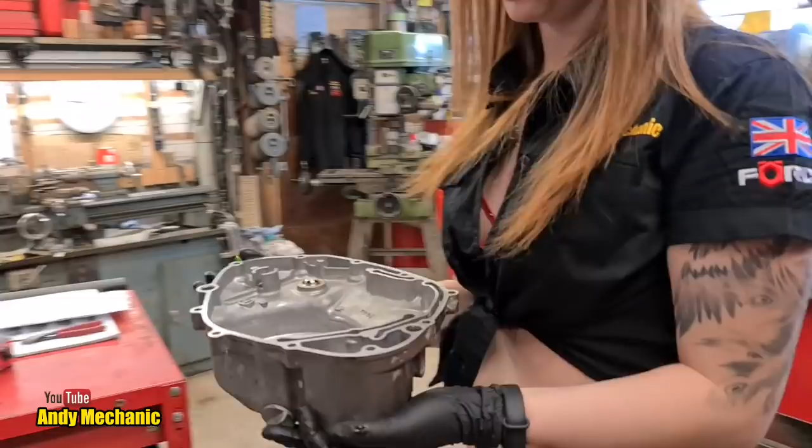So that rod, that dowel that's sticking out, the thready rod, that's a really good thing to start off with, isn't it? It just helps you to line everything up. Yeah. So slide it on parallel if you can. That's it. Cool, yeah.

So, oh, I got hair. It's like a curtain coming down. Holy moly. Okay, so we just got to give it a wiggle. There we are, that's it. It was just on that seal, wasn't it, on the kickstart?

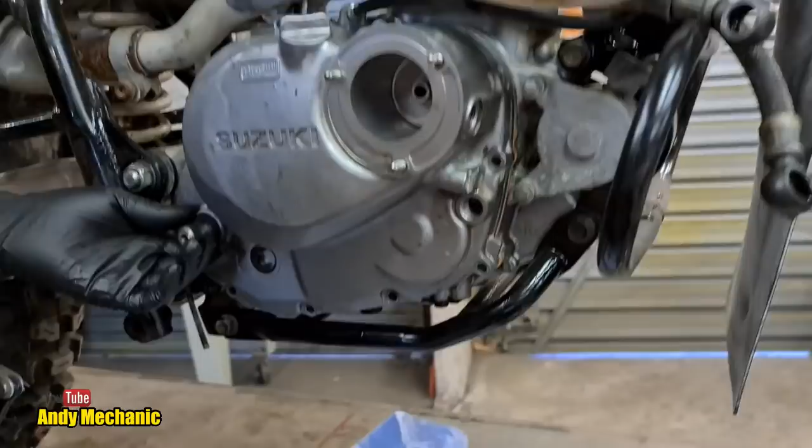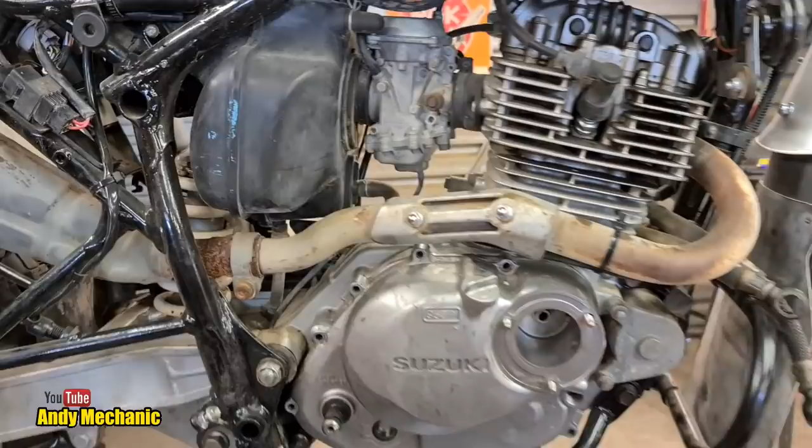Okay, now the next bit is the fun, and it really is fun now because we've set ourselves up to not be very efficient. We don't know which bolt goes where around the cover because we just chuck them all into a tray. What you can do if you're really keen is get a bit of cardboard and poke them through in the order that you take them out. Yeah, but that's way too professional for us, you know.

Okay, well, obviously you can use some logic. Some are a lot deeper than others, but just make a start and make your way around and see where we end up. Cool. I'm pretty sure it went around here. Yeah, because you took them out, you've got far more idea than I have where they go. So you reckon that's that one? That's a lot of threads to wind in, though.

Because you'd normally expect them to stand proud about maybe 10 or 15 mil before you start to screw them in. So you top one. Yeah, because that's a dowel one, isn't it? That's a dowel. There's a dowel behind there. So we know that the threads are a lot further back. That feel better? I think so.

Yeah, try that one. Right, what else have we got? I'll grab a few of these. I'm going to get a wire brush because there's still quite a lot of silicone on these things, isn't there? So I can be cleaning them as you're winding them in. And remember, you've got that screwdriver with an 8 on it, so you could use that to spin them in if you want.

Oh, I bloody hate silicone. Orange Hylomar and red Hylomar. Whenever you bought a motorcycle in the UK, there'd be Hylomar all over the place, oozing out where all the gasket surfaces were - this big furry orange Hylomar. Yeah, they hadn't even bothered to wipe it flush, you know. Did my head in.

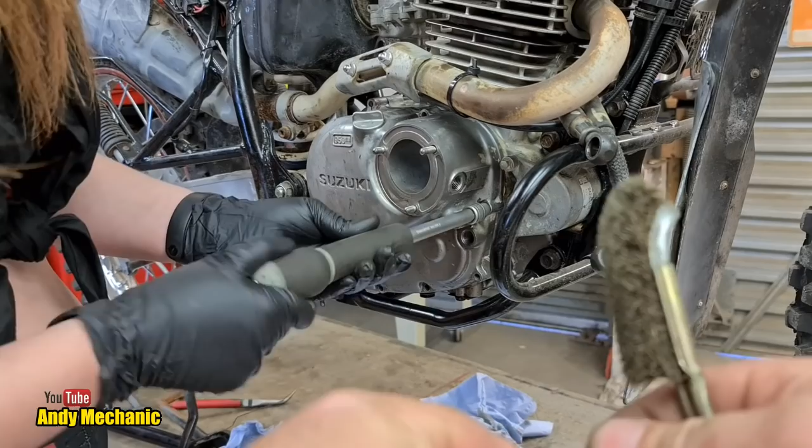Two things at once going on camera. That's value for money, that, isn't it? That's us really respecting your time, and we know you're busy people, so trying to speed things up. All right, Holly, that's for you. Cool, I'm going to steal the whole tray actually because it's easier than reaching for the camera all the time. Jeez, okay.

So yeah, you should always have at least, I would say at least 5 mil, if not 10 mil of the bolt proud before it starts on the threads. There you go, there's your next one. God, I get all the best jobs. Mind you clean the covers, so that's all right.

And you're just doing them up snug, you know, just finger tight. You don't want to be putting any pressure on them yet because we need to. I'm going to the bottom and then back half a turn.

Oh, you're a legend. Too good. I was going to keep quiet. There is no need for me to be here anymore. I can retire, have a nice holiday, you know, just relax, hammer springs, just chill out, let you run the channel for me. You probably get a lot more subscribers than what I've got, to be fair. Right. Sorry, I was busy talking. I can't do two things at once.

There you go. These are quite short ones, these, aren't they? Yeah, these ones.

Now these are an M6 bolt, and it said in the manual 10 Newton meters. Hang on, let's try and get that sorted out. 10 Newton meters, is that going to focus? Yes. Right, that's 9 when it's at 0, 9.5, 10. Lock it off. There you go, Holly, all yours.

So you can just work your way around the casing. You don't have to do them in any order, you don't have to do opposites. Normally I would do one and then one opposite and just go around. That's my take on it. There you go, that works. It just gets it sat snug first before you finish.

Now we're looking, all right? Good. Good stuff. Much tidier job than before, I'll tell you that. All done? Yep. Fantastic. Well done.

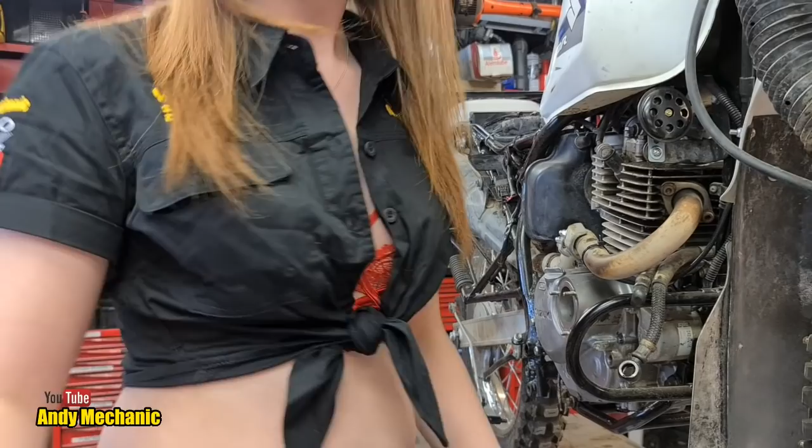Right, Holly, I think next we'll fit the 2 oil lines for the oil cooler. Yep, and in the tray are the 4 sealing washers that we need to use. We checked yesterday, the 2 bolts are the same, so it doesn't matter which way around they go. They should be both the same length. So let's get that done first. If you do that, I'll look in the manual and try to find a tightening torque for those bolts. Okay.

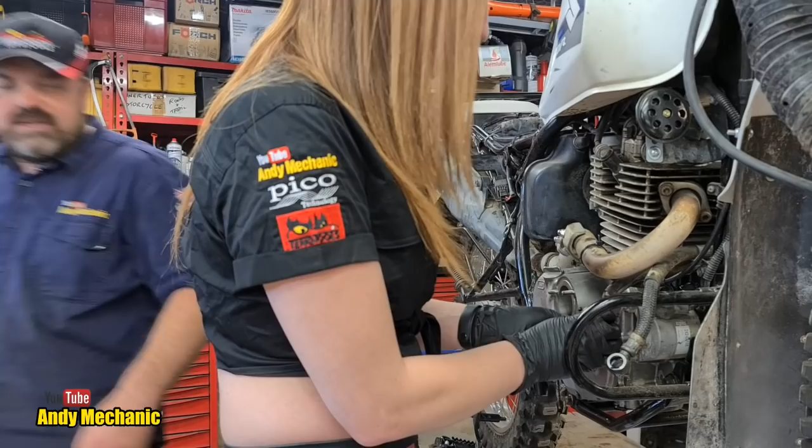There you go. Right, torque setting - I'm not sure if they're going to have a torque setting or not, because you usually just tighten them up till they feel tight, kind of like till they feel sealed.

Here we go, I think we should cut the cable tie off now because it's in the way. Oh, is it in the way? Yeah. Oh, good call, side cutters. I don't know where they are, they could be anywhere. Oh, they're there, yes, on the bench. Okay.

Yeah, good job, we finished that anyway. Okay, are you waiting for me now? No, you're still busy, aren't you? Yep, cool. Oil cooler bolts. Fuel and lubrication, okay, oil cooler.

This one hasn't got an oil cooler on it. Oh, come on, Suzuki. I might have to just do it Andy-torque then. That's just in the supplementary bit.

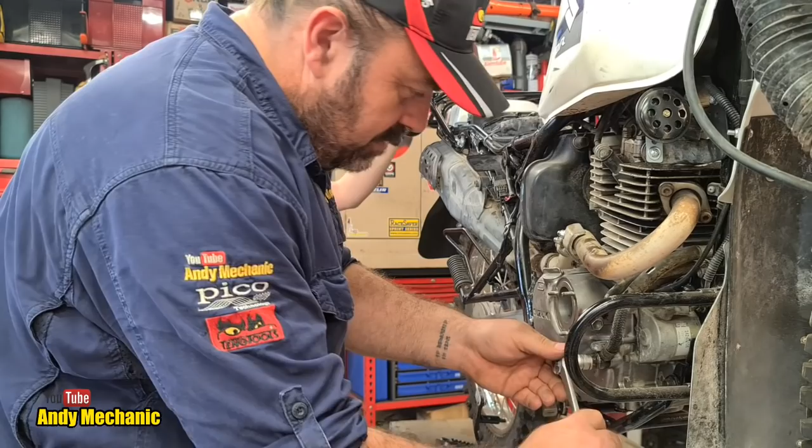Okay, happy with that? Let's just give them a little check. You may well have done tight enough. We'll soon know because it'll spray all over the workshop, won't it? That's fine, is that? Yep, that'll do me nicely.

Okay, so we've done the clutch cover. We've torqued down the bolts to 10 Newton meters - well, Holly did that for us. The oil cooler lines are installed, couldn't find a torque setting for that, like I said. Holly, off camera, is just going to reinstall the brake lever and the kickstart. Pretty simple job, you saw how it came off. It's very easy to put them back on in reverse order. So we'll crack on with that to try and save a bit of time, and we'll see you very shortly.

Uno, dos. Done. Right, Holly, back to the bench. Now then, crew, we are done. All finished, isn't it? Yeah.

Pretty cool. So the kickstart's back on, the side stand's back on with the foot peg, the fiddly little brake light switch trying to get the spring back on, and getting the split pin in the back of the brake pivot as well. Absolute ball ache, to be honest. Thanks. I mean, imagine it's all full of mud. You're just going to give up. Yeah, I don't need a rear brake. Just carry on, you know.

We haven't bothered to fit the new filter yet. That's in the next video, which covers the basic servicing of the engine. And then once that's done, we've just basically got the fuel tank to bolt up, side panels on, battery to go in, seat to go on. Oh, you've got a brake lever to change, haven't you? That's a pretty quick job.

And clutch lever, yeah. Oh, that boot. Yeah, the lever's brand new actually on the perch, but so we've got that rubber boot to fit on the clutch. But now, hey, we're really, really getting close, to be honest. It might not look it, but we're on the final roll, you know. We're nearly there, Holly. Awesome. It's pretty cool. Right, back to the bench. Cool.

Okay, crew, well, hopefully you found this video helpful, replacing a wet clutch on a motorcycle, and let's face it, nearly all of them are. And the design of the clutch on the DR200 really replicates the majority of bikes that are out there, but bigger bike, bigger components, but the basic principle is exactly the same.

But do be careful, manufacturers sometimes have their own specifics, and we found that with the positioning of that first friction plate in the basket. It had to be aligned specifically with it, angular wise with the basket, and there were some marks to line up, and it wasn't done before, but it is done now.

Yeah, cool. So it's always a good idea to download the service manual and double check, or assume the person that did it before did it right and replicate what they've done. But hey, that does leave you open to error. It's always best to read the manual.